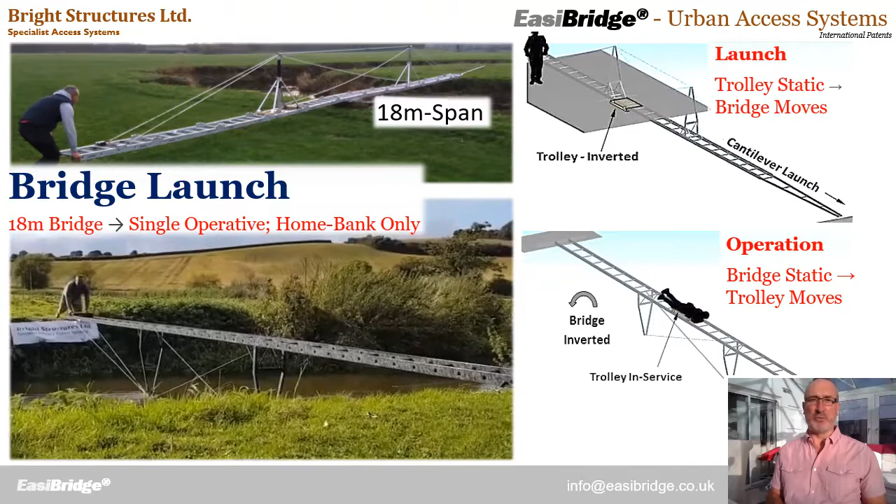That was a 10.5 metre bridge. We can extend the system up to 18 metres, still installed by a single operative from the home bank only.

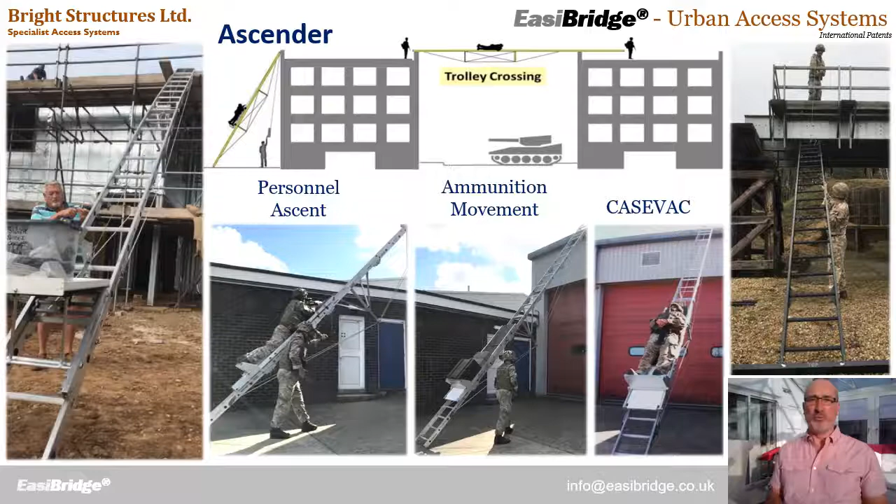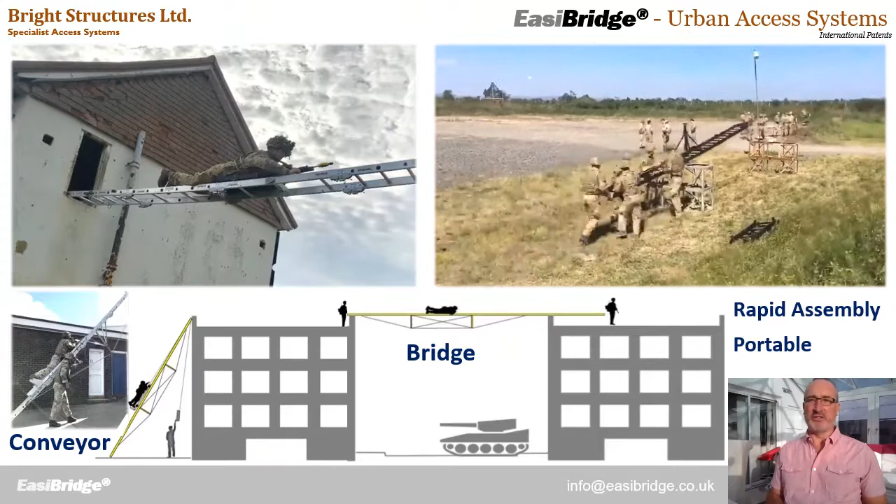We can also launch vertically to gain rapid access to the side of buildings, then use that to move personnel, ammunition or equipment up the outside of buildings and subsequently onwards to move between buildings. Here we see it first used as an ascender to convey up the side of the building, then pulled and recovered to be used as a bridge to move onwards between buildings.

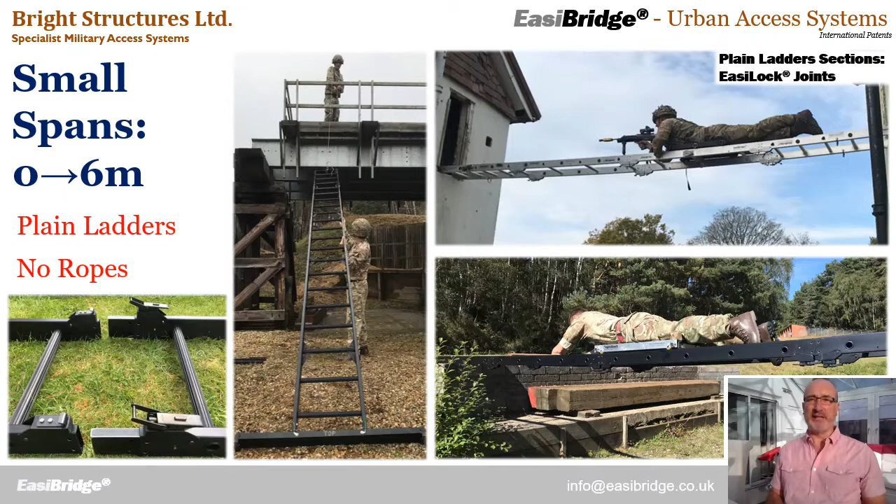Span increments of anything up to 6 metres use very basic, plain ladders with no ropes. Up to 10.5 metres we had a single stay and 2 ropes. For 18 metre spans we had 2 stays and 5 ropes.

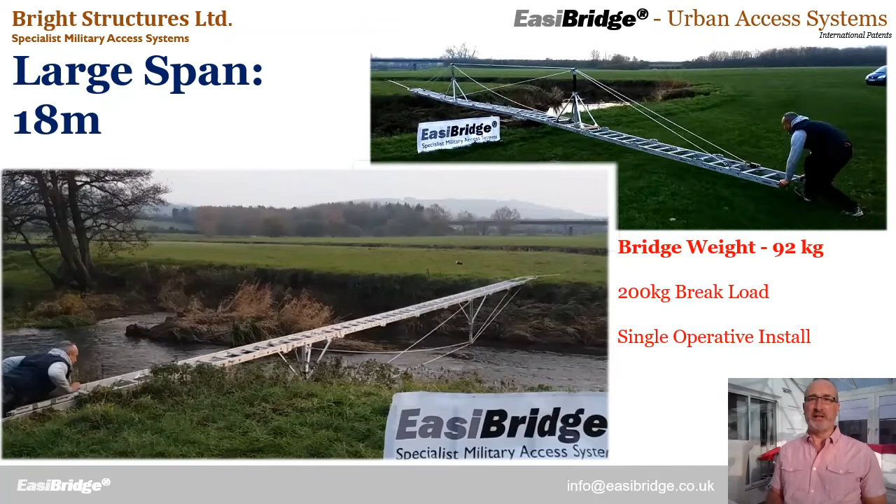Here we see a large 18 metre span being installed and crossed. This bridge only weighs 92 kilograms for a 200 kilogram payload, still installed by a single operative.

Here's a summary of all those bridge sizes. Key thing to note is these component sizes, 1.5 metre ladder sections used throughout. Vertical systems tend to be limited to 10.5 metres in range here.

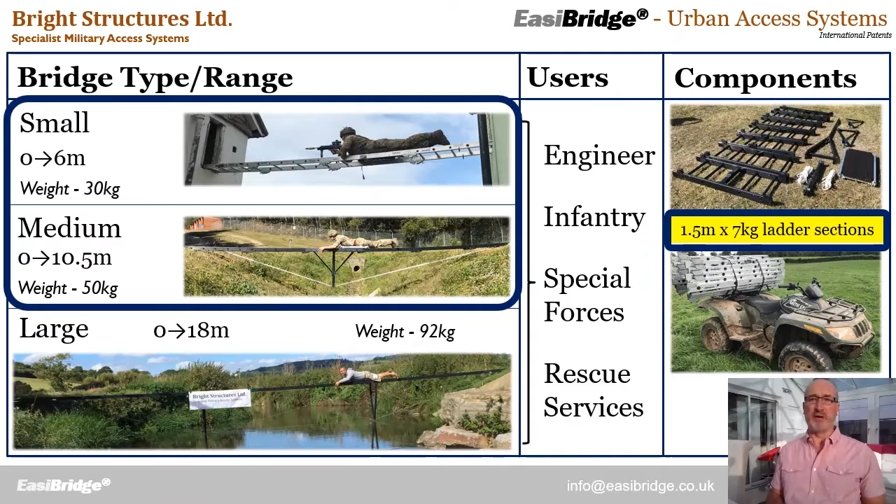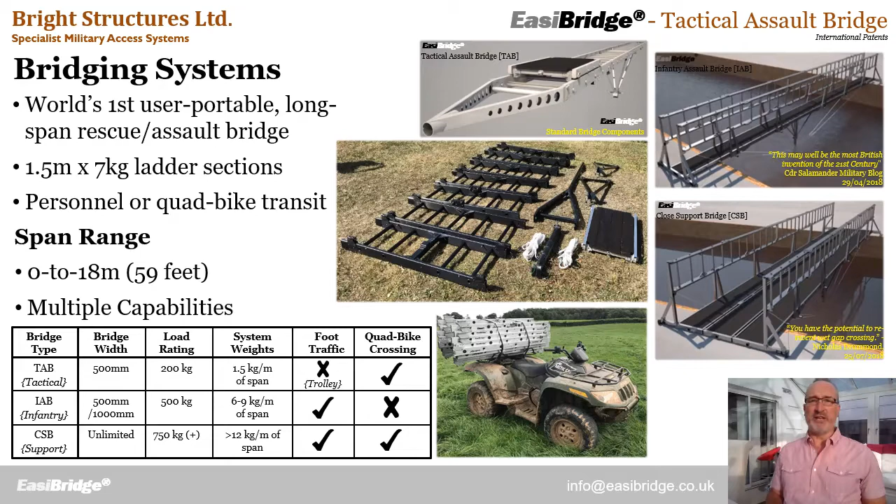Key to the system is this portability. A complete 12 metre bridge fits on a single quad bike using 1.5 metre ladders. This is the world's first user portable long span rescue and assault bridge, all built from 1.5 metre, 7 kilogram ladder sections, designed for personnel or quad bike transit. Span range up to 18 metres with multiple wider capabilities.

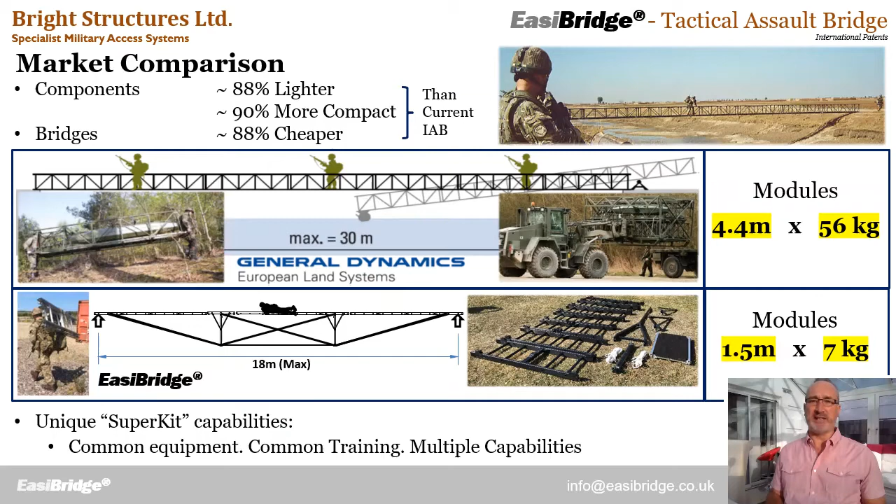This is a market comparison with our nearest rival systems, which use much bigger, much heavier modules. By comparison, EasiBridge is 88% lighter, 90% more compact, and 88% cheaper.

Unique selling points: portability—a 10.5 metre bridge only weighs 50 kilograms. Range of 18 metres with access from one side only. Cost—this is essentially just ladders and ropes, so 88% cheaper than any alternative system. Finally, versatility—as well as the bridge, we offer 12 wider product applications.

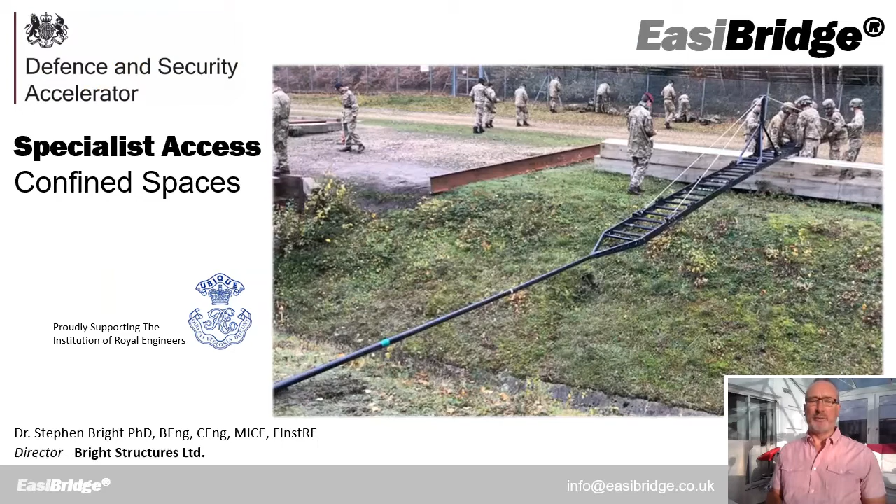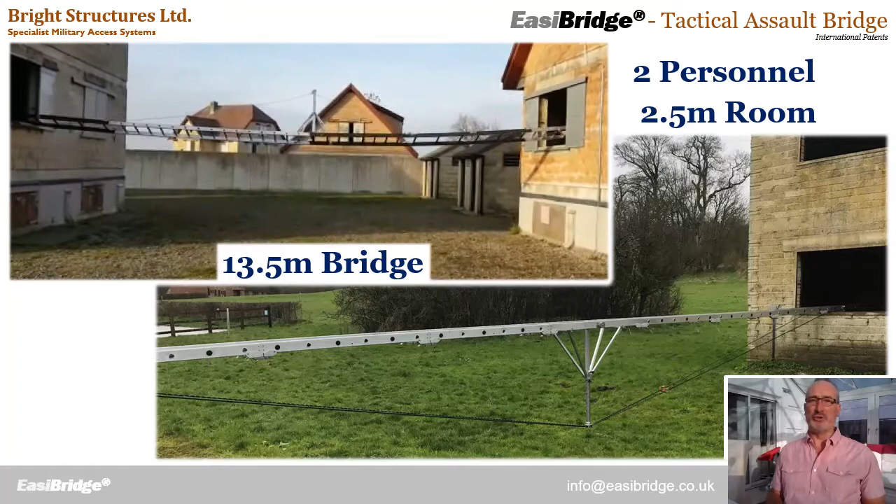More on that shortly. We also offer confined spaces specialist access capabilities. Here we see a 13.5 metre bridge launched and built by just 2 personnel from a 2.5 metre room. We launch it into place and then invert, ready for personnel to cross.

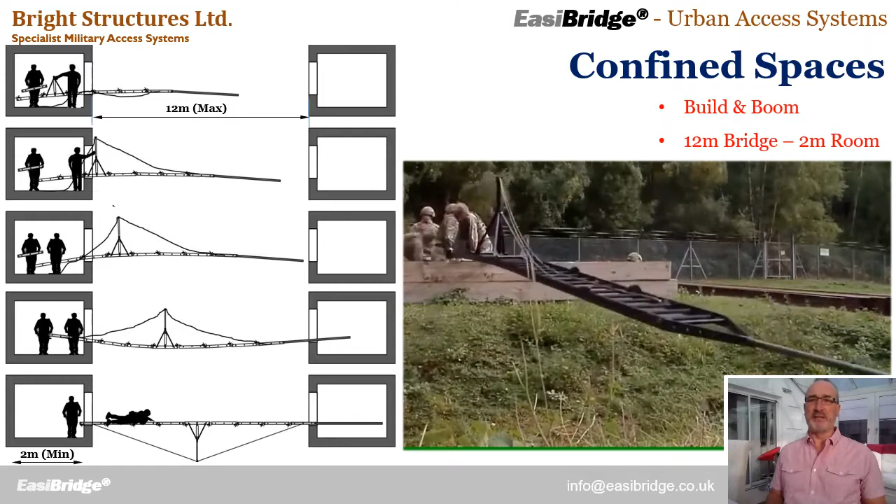Here we see that in more detail, where the ladders are added as the structure is built out of the space—a build and boom technique, so we can build a 12 metre bridge in a 2 metre confined space. Having done that, we can then move very easily window to window or rooftop to rooftop between buildings.

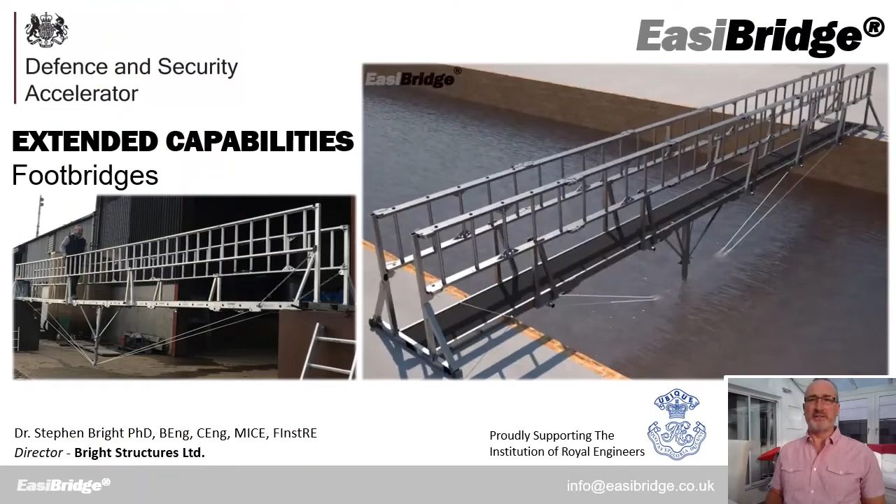We can also very simply build bridges from the system. This shows our tactical trolley bridge seen earlier, launched into place and crossed on the trolley. To turn that into a footbridge, we add handrails, which are just the ladder decks on their sides, and then deck over, ready for foot traffic.

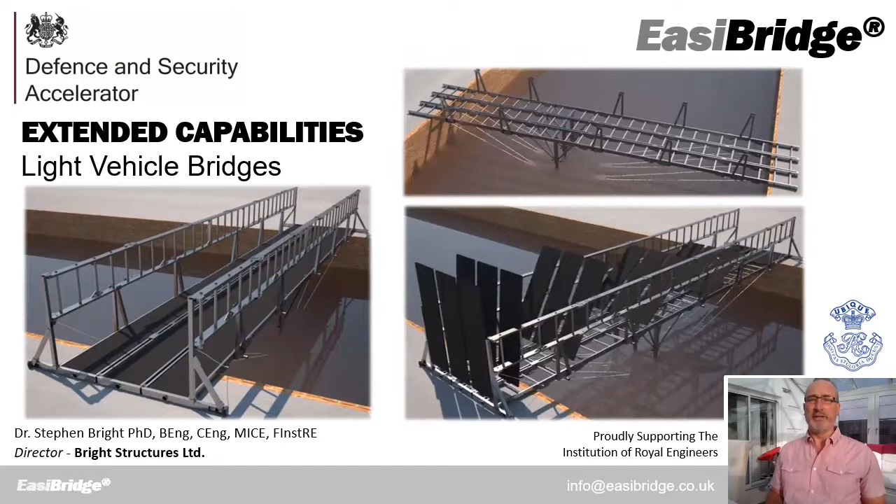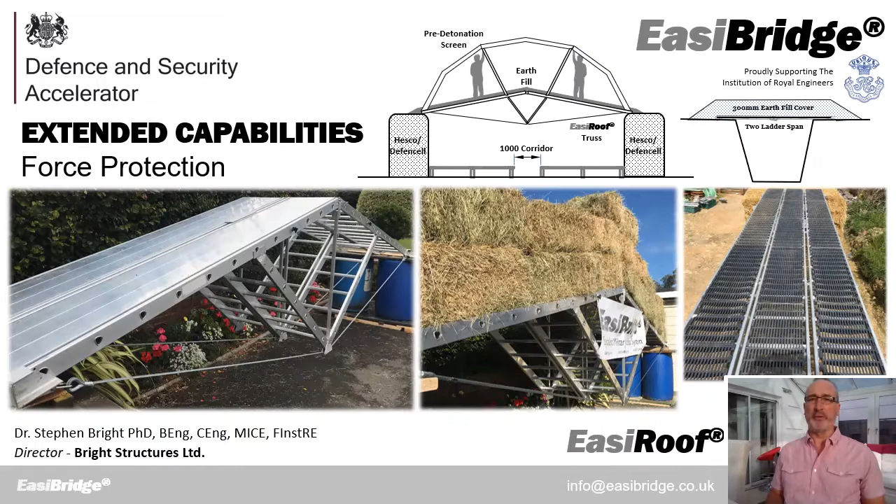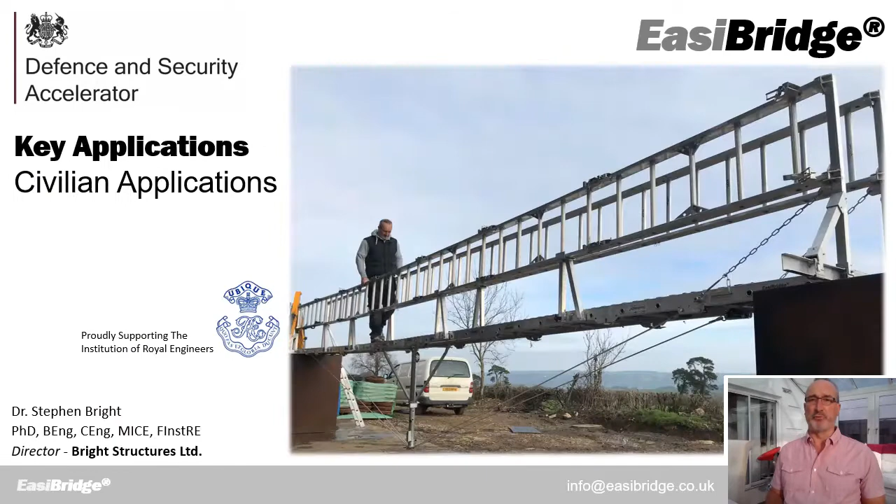We also have a number of civilian applications. Firstly, water rescue, an alternative to rope access crossings—we can offer 18 metre spans installed in under 20 seconds.

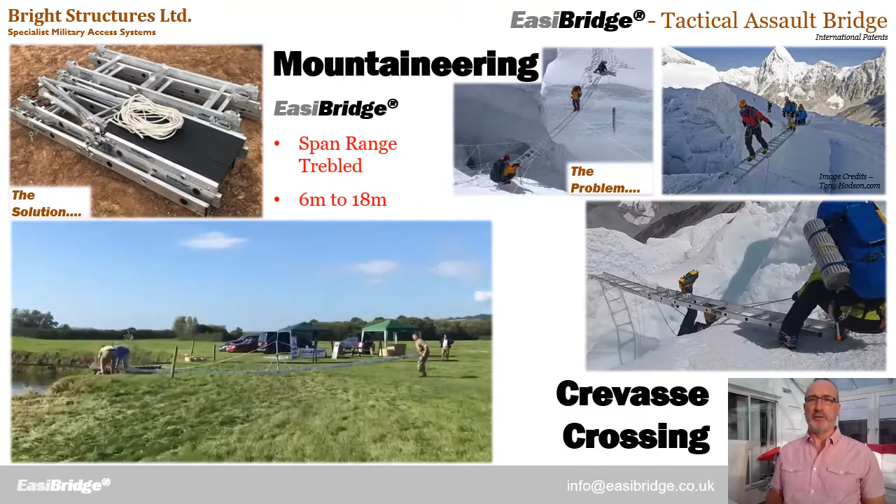We can also use the system for mountaineering crevasse crossings, where we treble the span range of existing ladders from 6 metres to 18 metres, for a much simpler, safer installation.

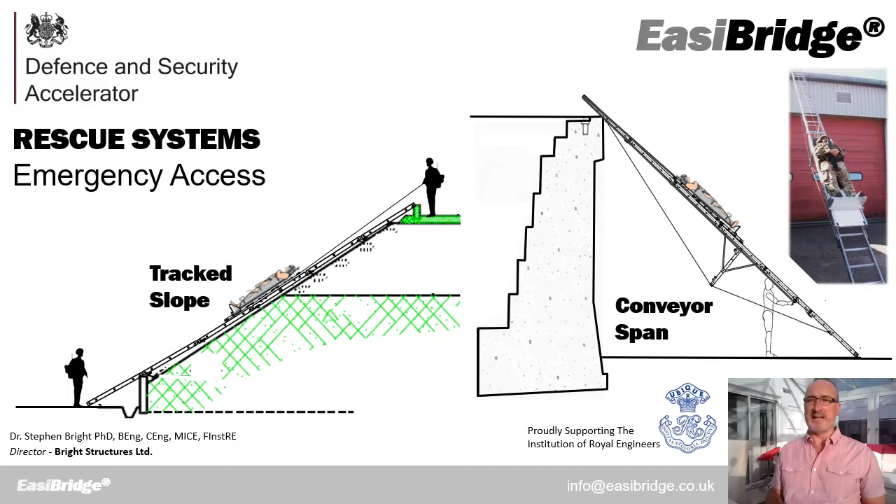We can use it for emergency access, using the ladders as a track, slopeway, or as a structure spanning over gaps. We can also use the system for mud and ice rescues as an alternative to these cumbersome air track rescue paths.

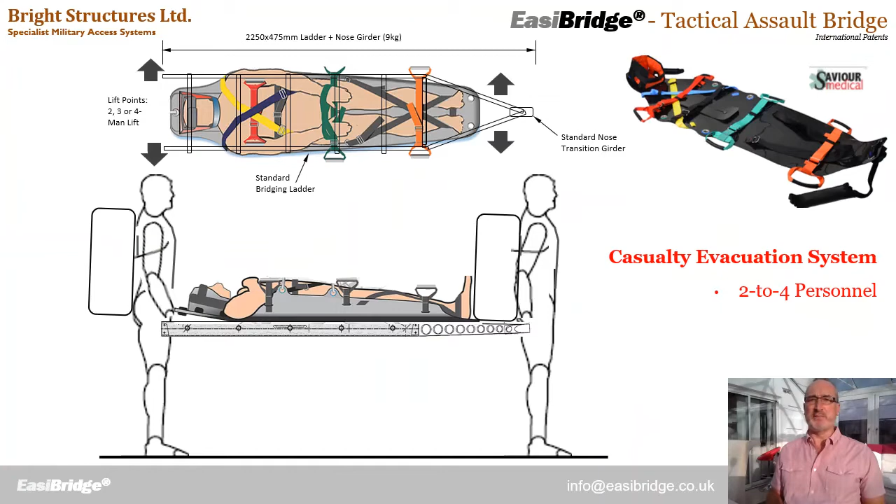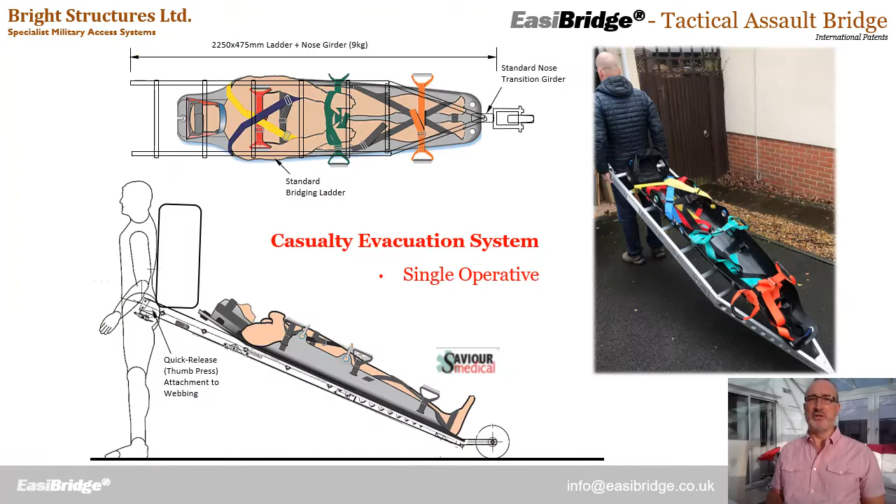For casualty evacuations, we can simply place a casualty directly on the ladders for carriage, or use that tactical stretcher kit. We can also use this infantry carrier system we've devised to carry the bridge—this carries the entire bridge—or we can use it for single-handed casualty evacuation also.

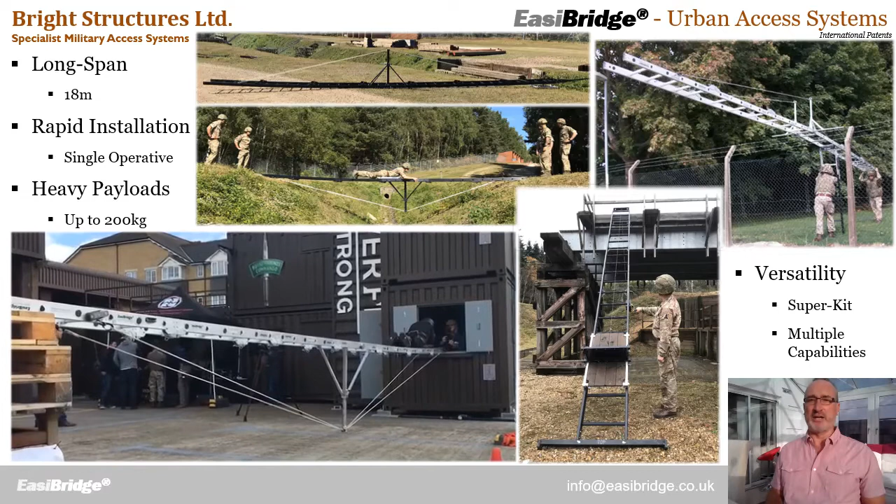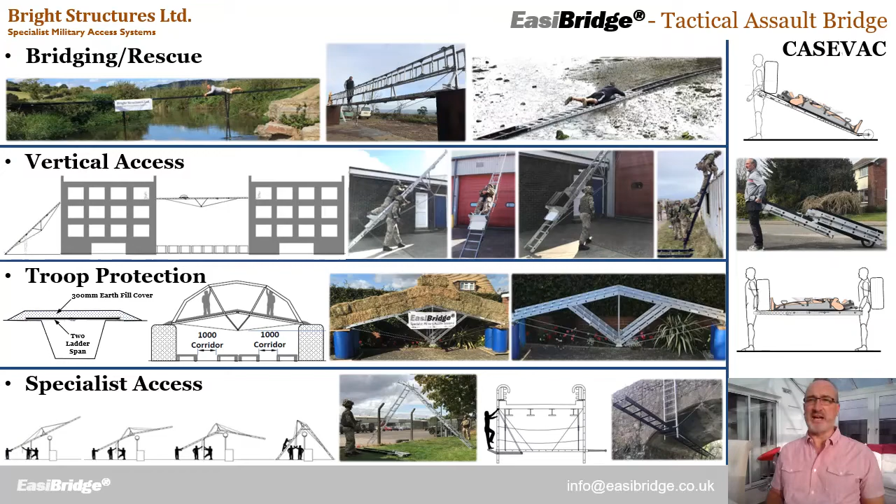To conclude, key to the system is portability, speed and versatility. We offer very long spans, up to 18 metres, installed very quickly by a single operative, with very heavy payloads up to 200 kilograms, and critically multiple capabilities. These include bridging and rescue, vertical access, troop protection, specialist access, and casualty evacuation, all from one common kit of parts.